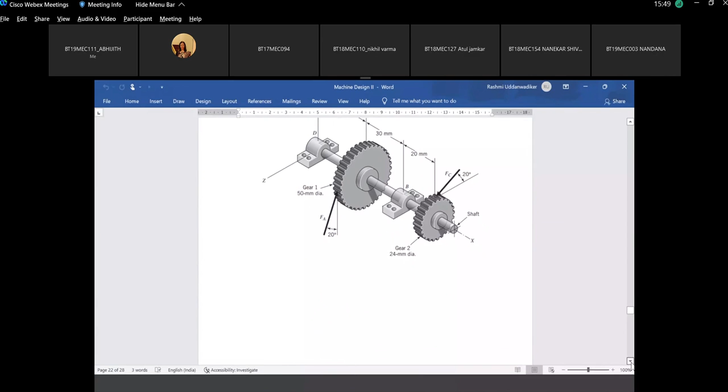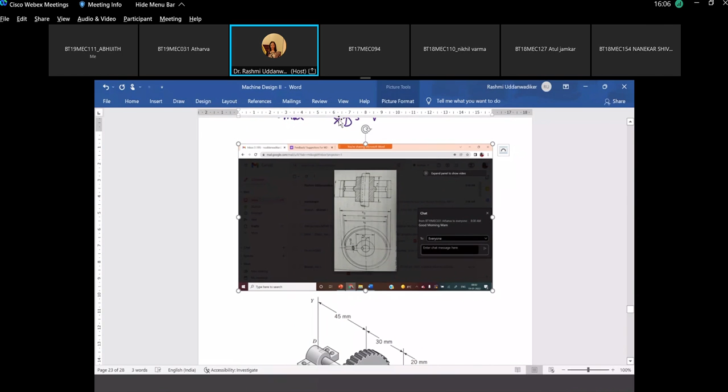Someone is requesting me to shift this lecture. I don't know who. You will have to give me some other slot.

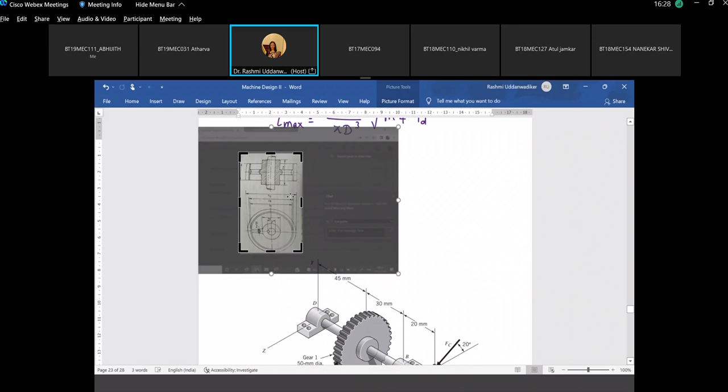Tuesday. Today is what? Wednesday. Wednesday, anytime between 10 to 1, I am okay. You must be having lectures. Ma'am, yes, because the different slots of different days, there is no free slot till 4 p.m. on any day. I know.

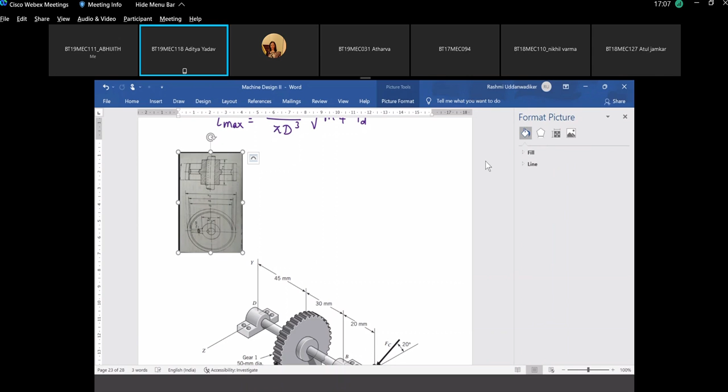So if there is no issue for 4 to 5 p.m., then we can shift. Okay. Somebody raised objection for this 4 to 5 also. Can't we shift this to some other time? Then there is only a single slot of mid break. Yes.

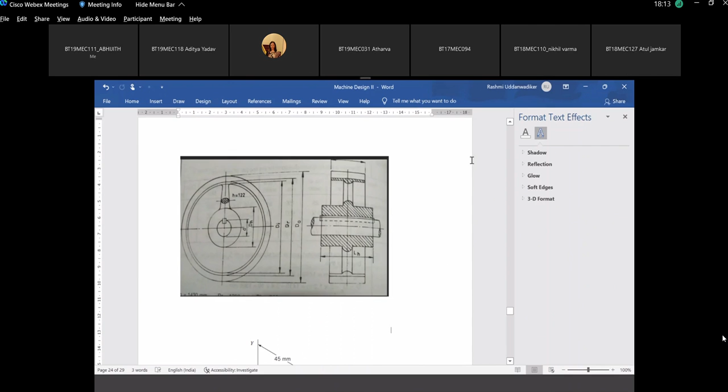Okay, let me start. So if I engage your lecture during lunch break, 1 to 2, I am okay with that. When would you have your lunch? You have lectures 9 to 1, right?

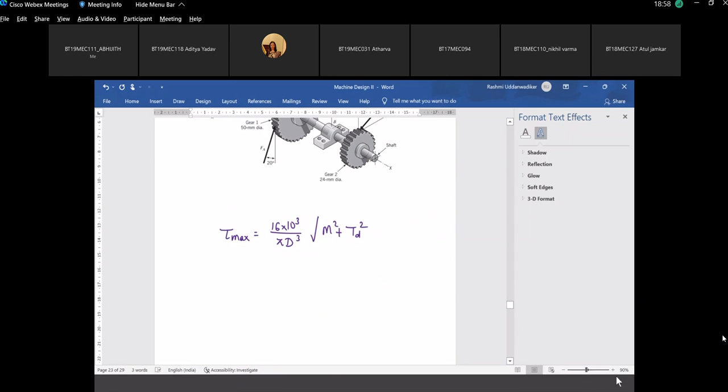Okay, we'll figure out later. As of now, let's begin our. Hello, ma'am. Yes, actually, we can't shift in between mid break also. There are TNP lectures between 1 to 2. So the schedule is packed till 4. Good. So we are okay at 8 a.m. then.

We already have how many students? 78 students. If they can wake up for 8 a.m. lecture, others should also be in a position to wake up, isn't it? Why shift then?

You don't have to travel anywhere physically to reach at 8. When we were having physical lectures, students used to struggle because their breakfast is served between 8 to 9. So if they had to reach at 8, then most of the time, few hostel mess which were not ready at 8, they had to skip their breakfast and then they'll directly get the lunch at 1. So that was the excuse they gave, reaching for 8 a.m. lecture. If they have to reach at 7:50, they have to start from hostel at 7:40. So this is logical, isn't it?

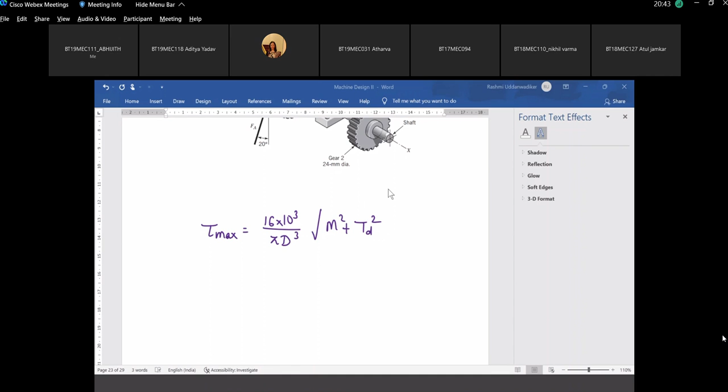Well, let's start our discussion. We were talking about this gear pair design, where we were working with this two-stage gear reduction with a motor with a set of gear P1, G1, another gear set P2, G2, and then a rotating drum using a hoist which was lifting a weight of the given magnitude. We have designed the gear P1, G1, we have designed the gear P2, G2, and what are their diameters?

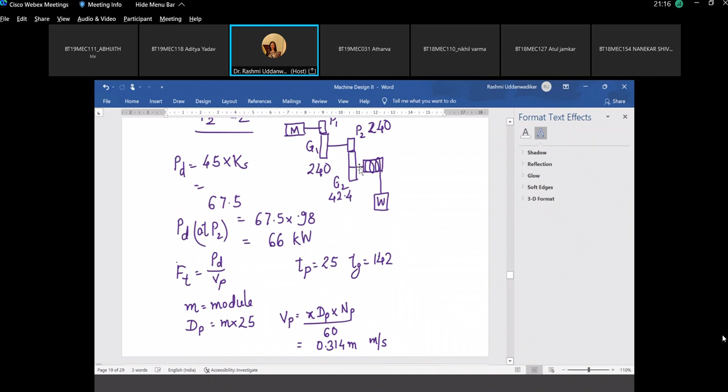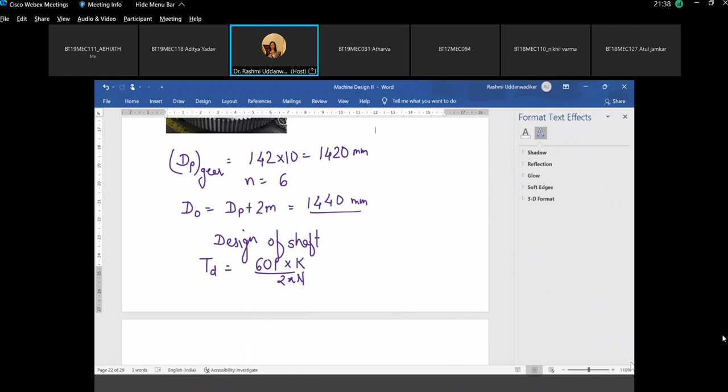If you can quickly revise, yeah. So we have seen for the stage 2 with module 10, the diameter of the gear comes out to be 1420, which is the largest gear, and so this will be the heaviest of the P1, G1 and P2, G2. So we'll start with the design of shaft, which is carrying this heaviest of the gear. So this is just a representative diagram. This is not exactly what we are working with. Now this gear would be mounted on a shaft, and the shaft is supported on two bearings. We have to design this particular shaft.

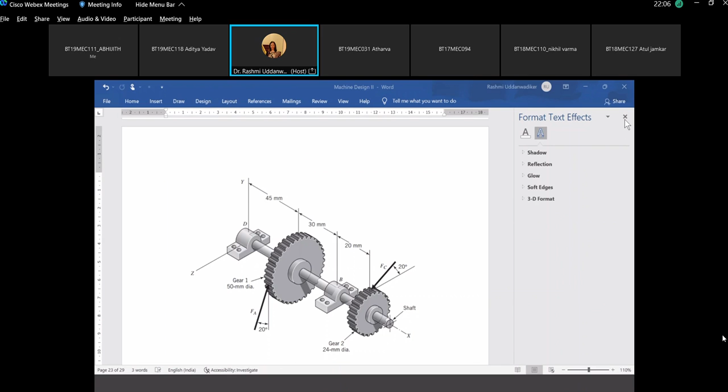And we refer to the design data book to get this particular formula for getting the design torque first. Now, what is the design torque? What is the power at this shaft? If we are designing it for the power PD, which was how much?

67.5 kilowatt at the motor shaft, after reducing the efficiency, what was the power available at the next shaft? You multiply it with 98% once and 98% twice. 66 kilowatt is the power available in the gear G1 or pinion P2. We are designing the gear G2.

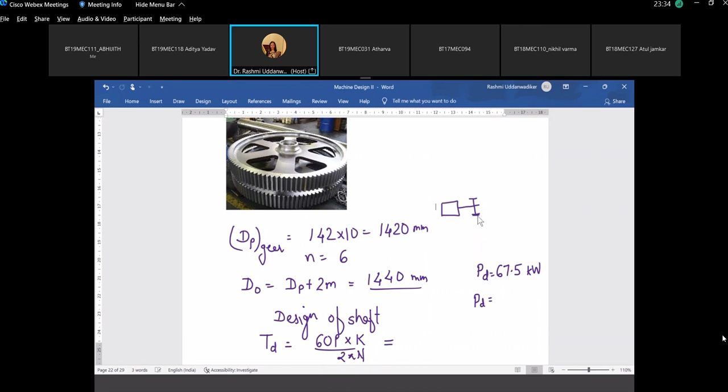The motor, this is the first pinion P1, gear G1. Here it is 67.5. And then here you have this pinion P2. This is the gear G2. And here you have this rotating drum lifting the load. What is the power available at this shaft?

Yeah. So you multiply this 67.5, there's a 2% loss here and 2% loss here. So the power available, to be precise, at this shaft is 67.5 multiplied with 98% efficiency for P1 G1 and 98% efficiency for P2 G2, which gives you how much? 64.83. Okay.

And this is rotating at what RPM? G2. Gear G2 is rotating at how much RPM? 42.4.

And what is the service factor here? Refer the design data book. Page number is 109, table 11.1. The service factors are given on page 112. Load factors for various machines.

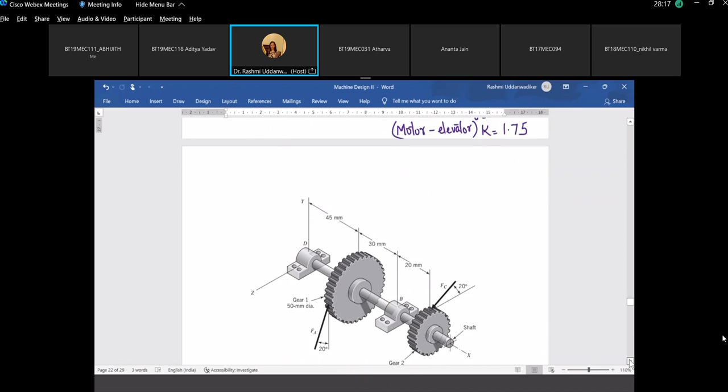Abhi, what next? This is a formula given for the solid shaft, which will give us the shaft diameter d, as 16 times 10 to the power 3 upon pi into tau max, root over bending moment square plus this torque square.

Now we have the value of TD. How to get the bending moment? If you have a shaft supported at these two ends with bearings, if you know the gear, its diameter, its thickness, since face width is known, from the density of the material you can find out its weight, its radial load, and from here you can find out the reactions. But here, can we get the reactions at the bearings in our problem?

What do we need to get the reactions? Can you give me what is the bending moment? Yes, anyone? Aditya? Nikhil? Yes ma'am, how can you get the bending moment? I have no idea. Atul?

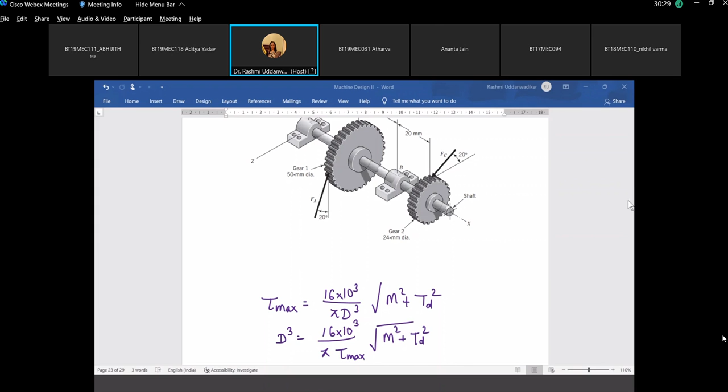What we do is, whenever we are designing the shaft, designing a pulley, designing a flywheel, every time you will be requiring the diameter of the shaft because we are designing all these parts individually. In none of the cases would the length of the shaft or positions of the bearings be known. So because we have to anyway solve this, we'll assume that bending moment is 0. And if this value is 0, you will have to manipulate or adjust the value of tau max also, so that the diameter is calculated only on the basis of TD.

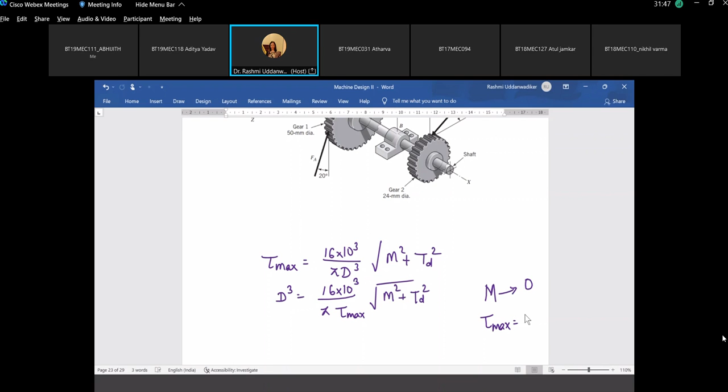What we do is, the value of tau max given should be less than 0.3 times its yield strength or 0.18 times its ultimate strength. If you refer to the earlier pages where the yield strength or ultimate strength is given, the value of tau max will come out to be almost 70 or 75 MPa. This is roughly 75 MPa for the material we are using, cast steel. So what we do is, because we are ignoring this, we reduce the value of tau max to 40 MPa for the material of the shaft. Normally the material of the shaft, given on the next page, is SAE grade 1015, 1020, and so on, and for all these materials the value of tau max is normally given as 75 MPa.

I repeat, if you are ignoring the value of M, we reduce the value of tau max also, to take into account the bending moment which is not considered. So for all shaft design, whenever you are ignoring bending moment, you can directly take the value of tau max as 40 MPa. If bending moment is known, then this is the maximum shear stress it can withstand. Since bending moment is not known, we are reducing this limit of the maximum shear stress also. Is that clear what we are doing here? Yes or no?

This will be into TD. Now, once we are done with individual design of components like gears, belt drive, wire rope, flywheel, bearings, at the end of the semester we'll be having the assembly design, wherein you will design everything: motor, shaft, bearings, flywheel, everything. Then the location of bearings would be given in the problem, or we'll assume a suitable location, and in that particular case you will be in a position to find out the bending moment. There we'll be using this value of tau max in the range of 75 to 80. I'll be asking you again why we are using tau max 40 or what is the actual value.

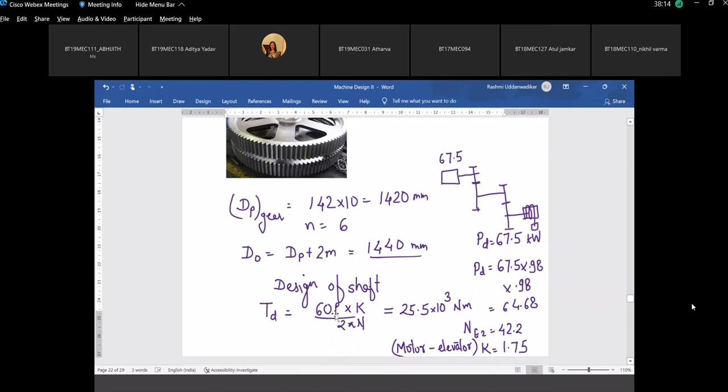Okay, try with this. We have already taken design power, so you can actually eliminate this value of service factor because now we are taking service factor twice. We had design power 67.5, and then also considered the service factor. Rated motor was 45, so if you are taking the rated motor power, then use the service factor. Now we are using service factor twice. Initially, for the design of motor and the pinion, we had taken a service factor of 1.75.

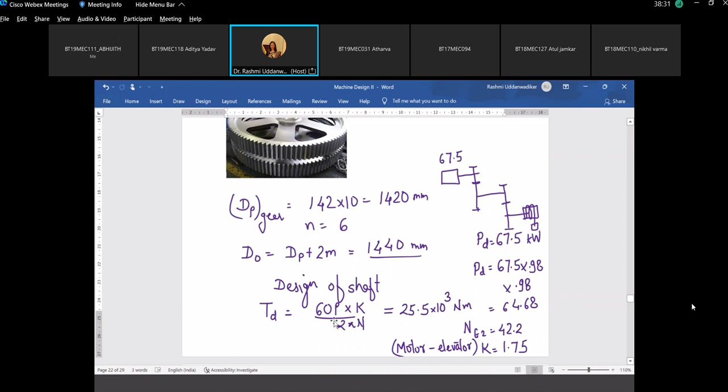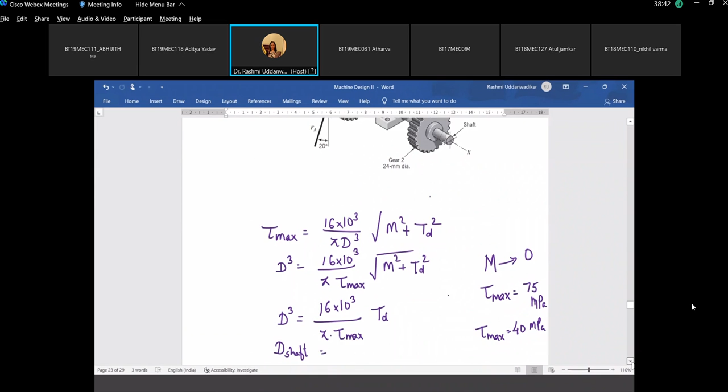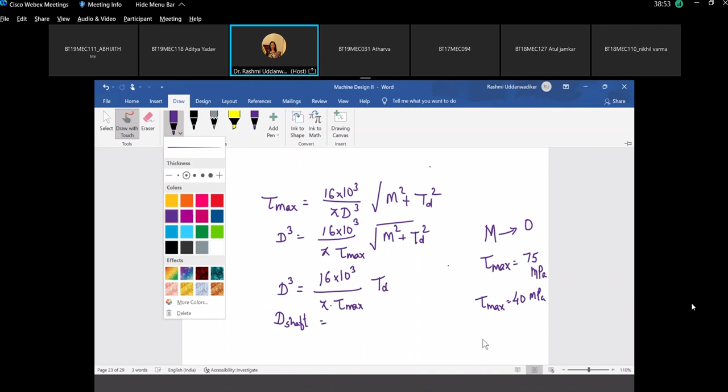Now give me, with this TD, what is the value of diameter of the shaft? You are still messing up with units. The answer for this is 125 mm or 123 mm. Somewhere this 10 cube, yes, it has to be 0.125. Earlier also it was 0.14 something.

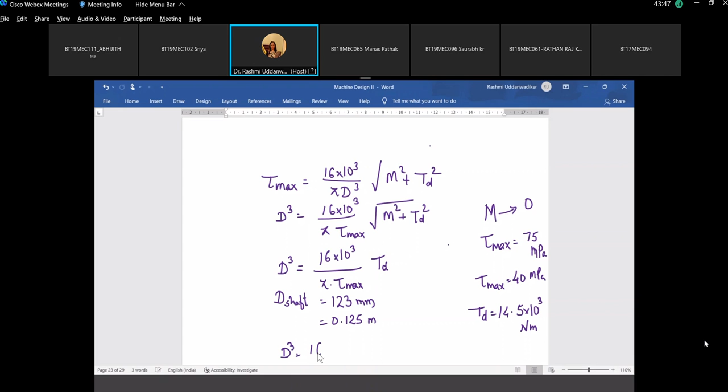Will you explain again, please? Explain what? The value of d cube should be 16 into 10 cube into 14.5, where 10 raised to 3 is for kilonewton to Newton and 10 raised to 3 is for meters to millimeters, upon 3.14 into 40 megapascal, which happens to be Newton per mm square.

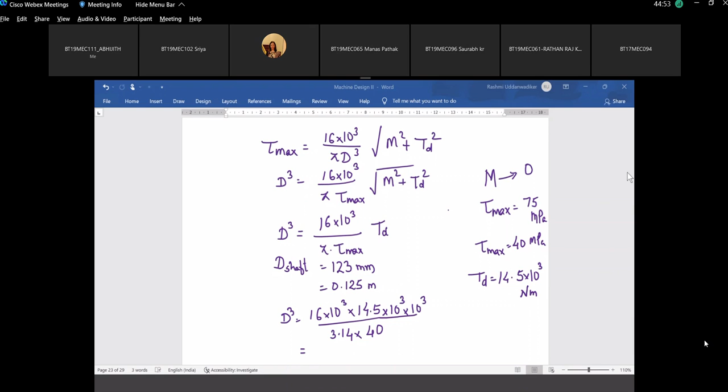Megapascal is what? Newton per mm square, right? Service factor is for the whole mechanism, not for the individual component.

This value is not this one. TD is in Newton meter, this is in megapascal, and you get diameter in mm. In this formula, if you refer to the design data book, TD is given in Newton meter, let it be in Newton meter, Tau is given in megapascals. And this 16 into 10 raised to 3 is already taking care of this value of D in mm. So it is this which should take care of your diameter in millimeter: cube root of 16 into 14.5 into 10 raised to 6, upon 3.14 into 40. And I am sure you will get 125, which is in mm.

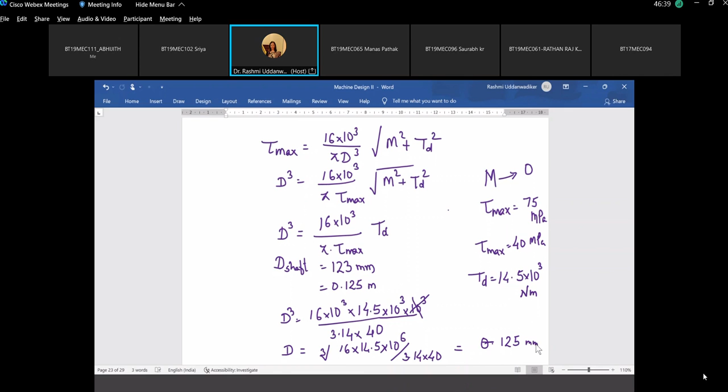Are you getting it? Yes, ma'am. Okay, going on to the next.

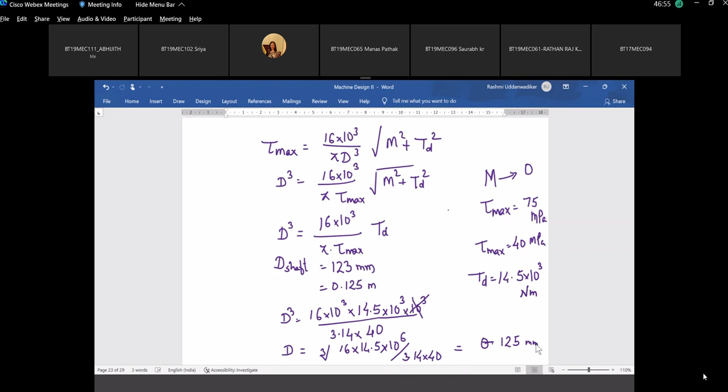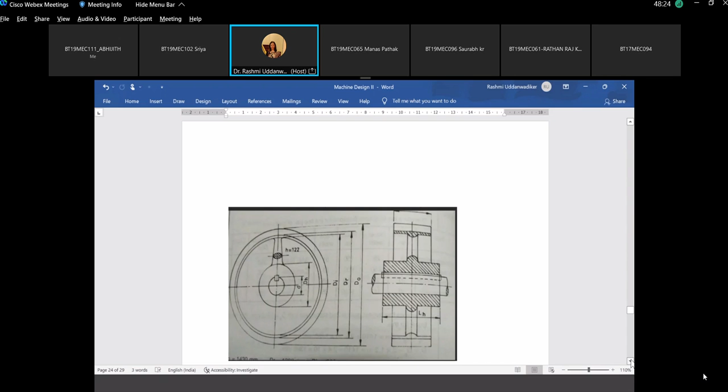Diameter of the hub will be 2 times the diameter of the shaft. This is given in table 11.8. So what is the diameter of the hub now? 250 mm.

Next is length of the hub. Give me the length of the hub. The same table gives length of the hub as 2 to 2.5 times d, where d is capital ds, the shaft diameter.

What value do you want to take? A range between 2 to 2.5, you can go with 2.2 or 2.3. Okay, let's go with 2.3. Give me this shaft diameter. 125.

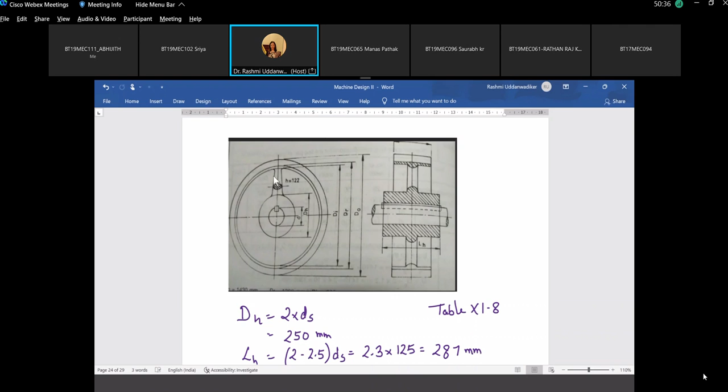Next is arms. Arms are normally of elliptical cross section as shown here. For getting its cross section, we have to find out the bending moment first for this cross section. So what would be the bending moment on the arm?

Can you tell me by simple logic what is the force coming perpendicular to the arm? What is the force which is driving the gear? It is the tangential force Ft, acting at what distance? This force normally acts at the pitch circle diameter, and this is the length of the arm. So what is this total length? It is the outer diameter dp minus the hub diameter dh, the pitch circle diameter dp for the gear, minus the hub diameter dh, by 2. And this bending moment is shared by how many arms?

Bharti, how many arms have we considered for this diameter? How many number of arms have we considered? 2? No. The last class we were discussing about the number of arms - it's 6. So this bending moment is shared by 6 arms. So this is the bending moment on each arm.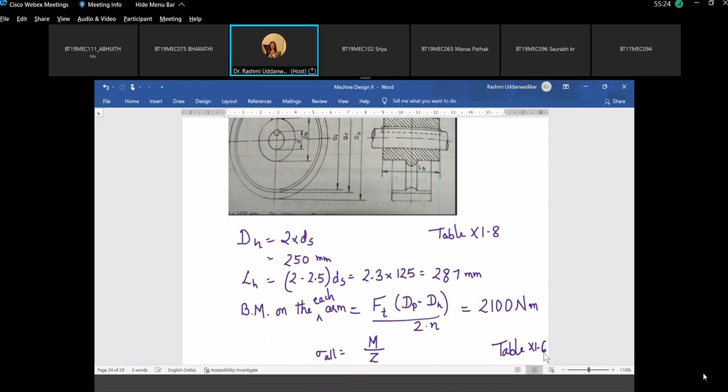So give me the value of section modulus. We are trying to find out the cross section of the arm. M is known. Allowable stress for arms made out of cast steel is 25 MPa.

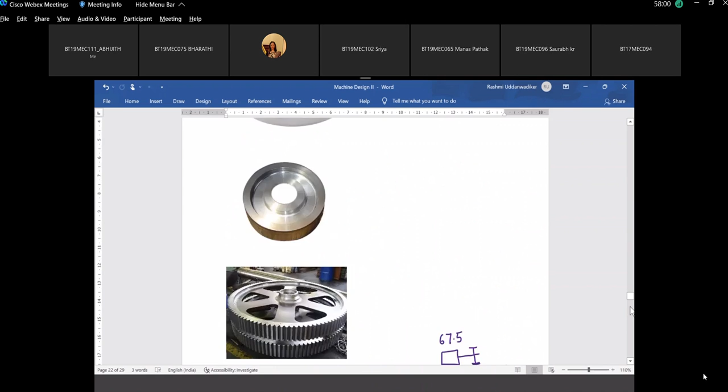This is Z. Now for elliptical cross section, what is Z? This is our ellipse with elliptical cross section. If this is the larger of two, and B and H is half of that, what is Z for elliptical cross section?

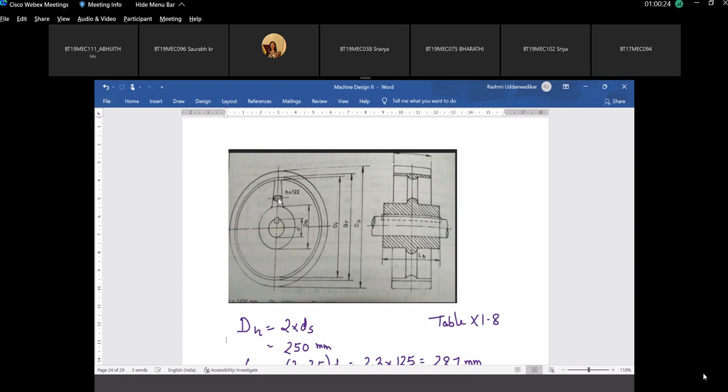It is pi b h square by 32. This Z is pi b h square by 32. Now B is normally taken as half of h, where the meaning of B and h is as given here.

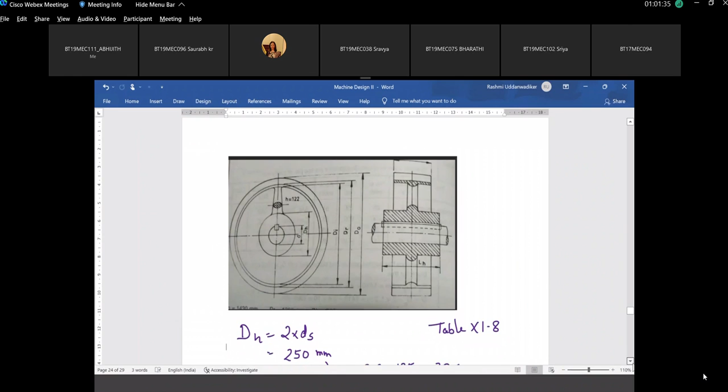This thickness of arm, which is the major axis, this is h, and perpendicular to this is B, which is smaller of this. So the minor axis of this ellipse is B and the major axis is H, and the minor axis we have taken as half of this. And so this is further simplified. This comes out to be pi h cube by 64.

So give me what is h? Pi h cube by 64 is 84,000. So what is h?

So 119.6 is its major axis, and its minor axis is half of this, roughly 60 - 59 point something.

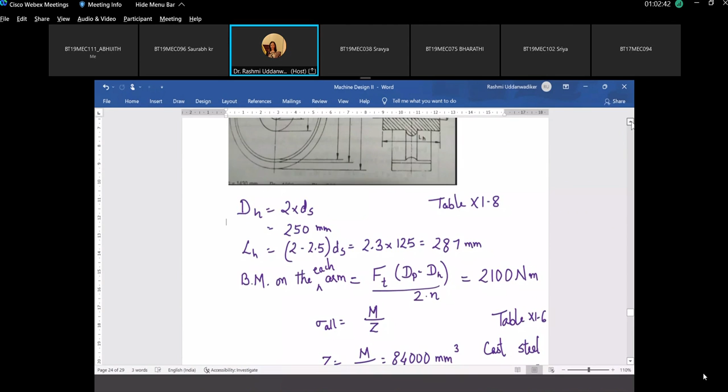Now one last point, again very important from your GATE examination or interview point of view. 59.8. Now there are how many arms to be placed across the periphery of the hub? 6 arms. We have to make sure there is enough space for 6 arms to be placed on the periphery. What is the hub diameter?

Hub diameter is 250 mm. What is the circumference? What is the space available here? What is the circumference of the hub? On this circumference of the hub, we have to place 6 such arms.

And this value of h is 122. So I must get 122 into 6, which should be less than the circumference of hub. This should be less - abhi to bhi aayega, right? So what is pi into dh?

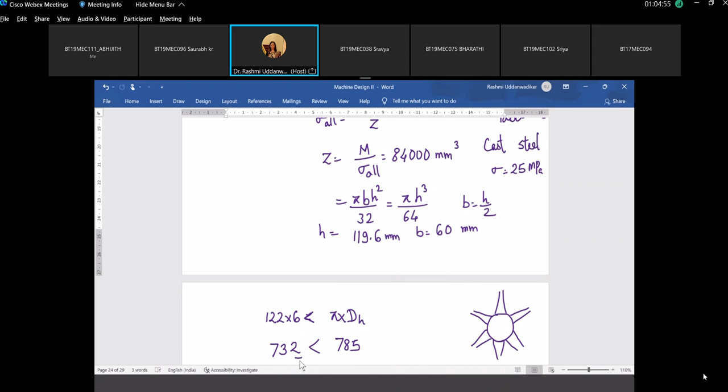Suppose you get this value as 800. Abhi humne hub diameter twice liya isliye. Sometimes for flywheel it is given only 1.5 times. If suppose this value comes out to be less, suppose this value is 800 and this value is 785, what will you do? So the space required for the base of the arm is more than the hub circumference.

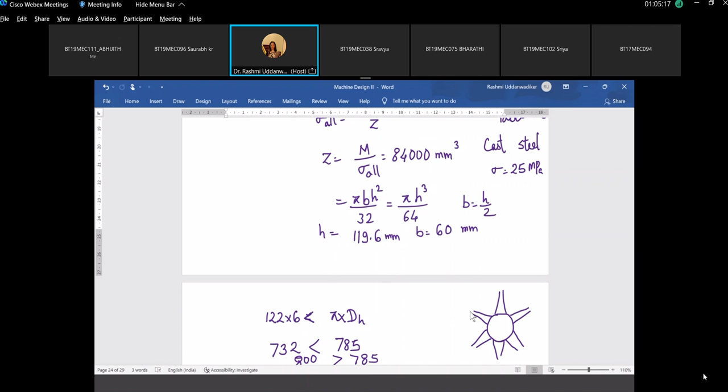So in a lesser space, you have to fit in more number of arms. What will you do? If anybody can guess - this is again a very important concept. Reduce the number of arms? No, you cannot.

Aur kya kar sakte ho? Fillets? Fillets ke liye you don't have space. Your arms are overlapping like this - ye ek arm ho gaya, this is another arm, overlap at the bottom. Yes, Manas is right.

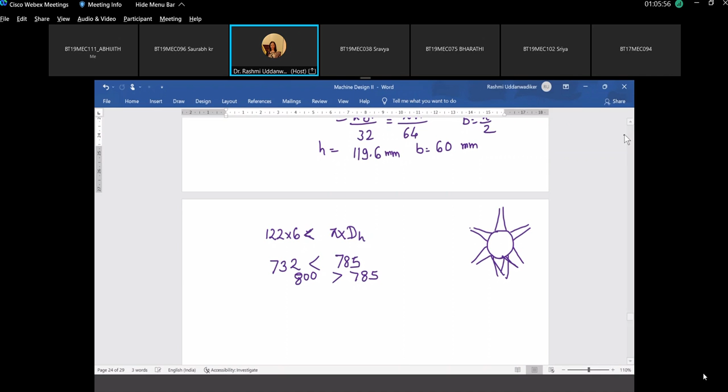Manas is right - increase the hub diameter. Now if I increase this hub diameter overall, the material required will be more. This is my hub - if I increase this hub diameter, now this is also giving you the answer.

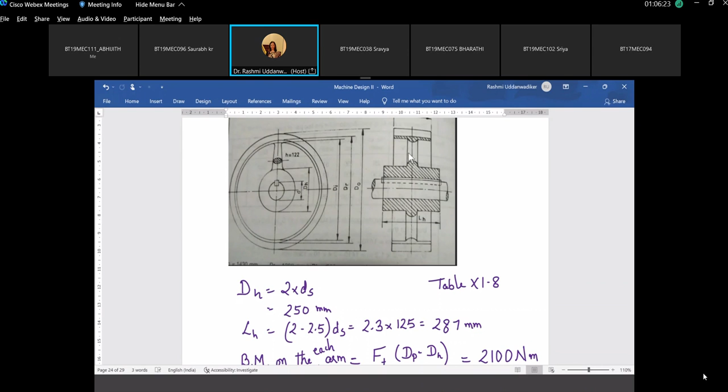This is the face width of the gear. The arm is not extending throughout the width - the arm is only for this much thickness. B value we have seen and H value we have seen. This is H, and B is only 59, whereas our face width kitna aaya tha - 85, 90 something.

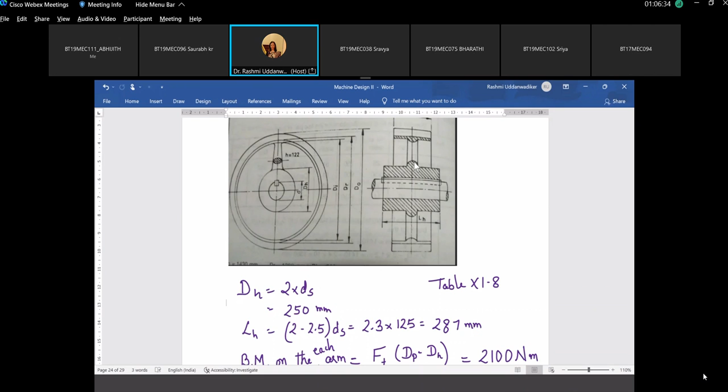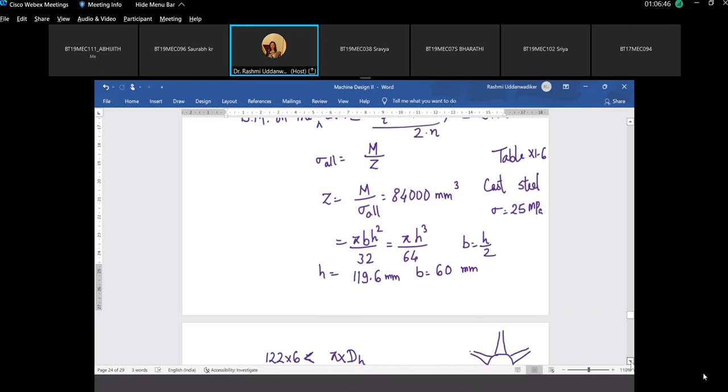So we will locally increase the diameter of the hub, giving this kind of local increase, and this is known as beading. A beading is provided - beading is a local increase in the hub diameter, so only exactly at the location where this is placed, we are increasing this hub diameter.

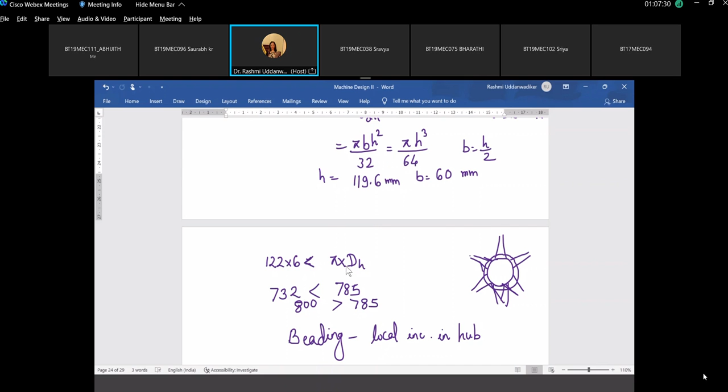So the moment you increase the hub diameter, the circumference increases, and now you have enough space for all the arms to sit in there. And that increased hub diameter would be pi DHB should be equal to 6 times your arms. So if this is coming out to be 800, then we find out the increased value - suppose your 122 into 6, or suppose your H value came out to be 140.

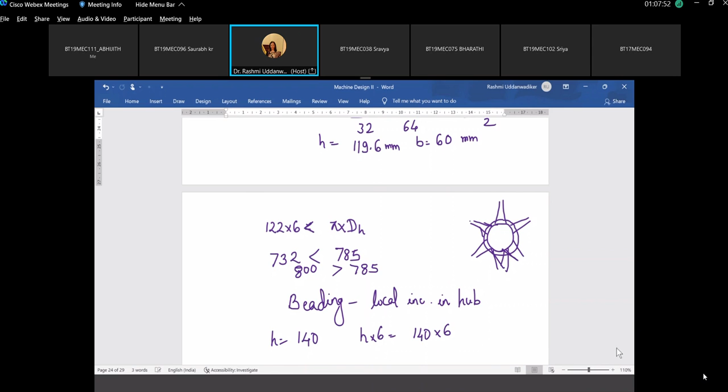Suppose this is just for explanation, so your H into 6, the space required here will be 140 into 6, which is how much? 760... 840. So we will equate this with pi into hub diameter with beading. This 840 by pi, this will be the new beading diameter.

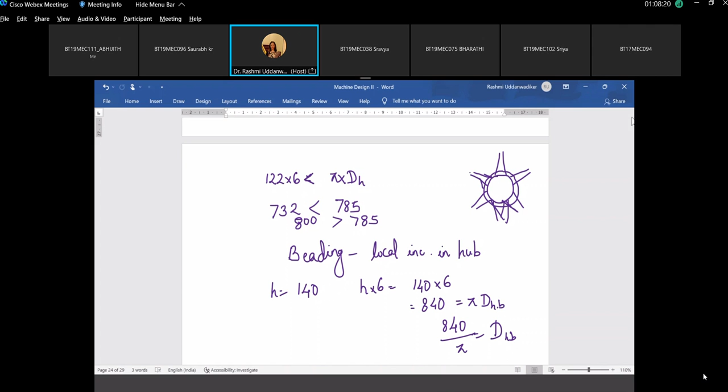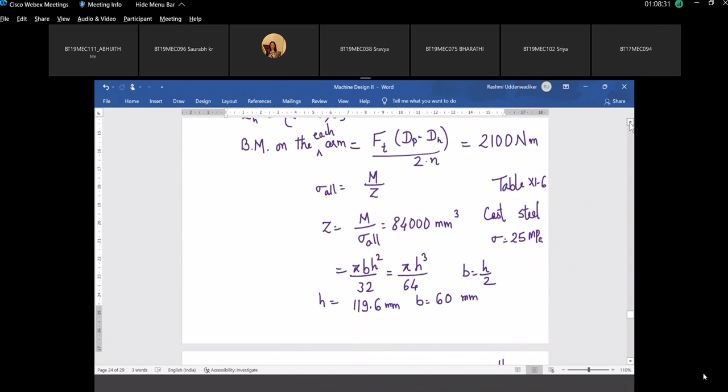This is a local increase - I'm showing you this figure again. This is the local increase in the diameter of the hub, and this is just to accommodate all the 6 arms. If you reduce the number of arms, the bending moment on each arm would increase.

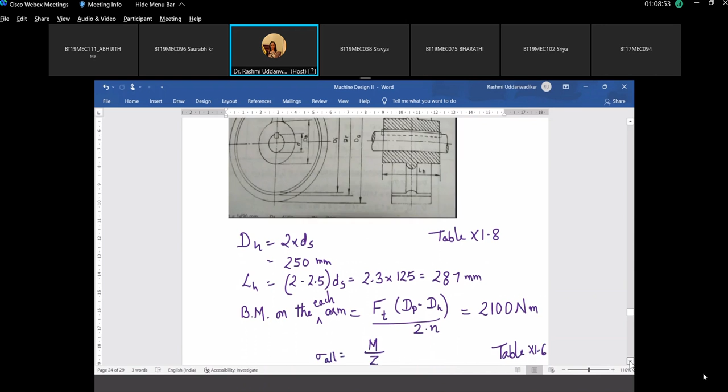Here n was 6, so you got 2100. With n equal to 4, this bending moment would increase. When you increase the value of bending moment, for the same allowable stress, your Z will be larger, and Z larger means again your B and H would increase. So your arms are too bulky, and so reducing the number of arms is not an option.

Yeah, fillets are anyway given - no, we're not designing for this fillet. And then you have a keyway design also for the given diameter of the shaft. The dimensions of the key are directly given. I'm sure this part you have done in your MD1, design of key.

Yes or no, Rajwal? Rajwal, have you done key design? Sravya, Ambika? I don't know why there's a delayed response on the chat box today. Are you done with the hub key design, and is this beading part clear? Rushika? Arshini?